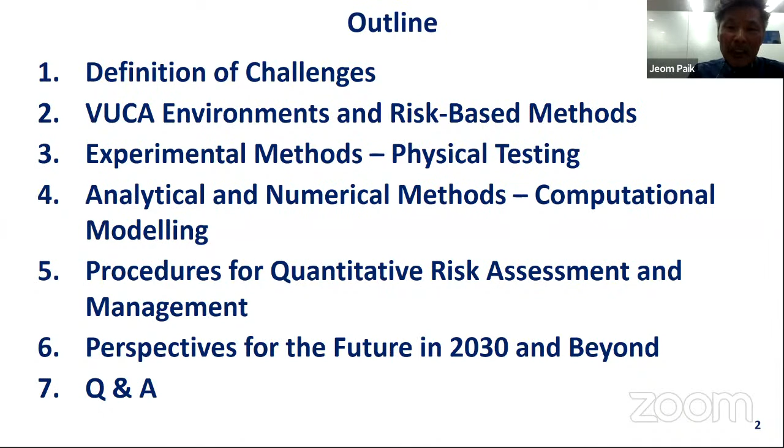Then I'm going to talk about the VUCA environments and risk-based methods, then experimental methods by physical testing, then analytical and numerical methods by computational modeling. I will present some procedures for quantitative risk assessment and management, and I'd like to say something about the perspectives for the future in 2030 and beyond. Finally, we are going to have a Q&A session.

Definition of challenges. The United Nations strongly suggests looking at the sustainable development goals in association with a total of 17 challenges. As a matter of fact, a number of the grand challenges are relevant. They may be categorized into 10 groups, which are equally important.

One of the grand challenges is the issue of energy shortage. Over 15% of the population on Earth are living without electricity. With a rapid growth of industrial systems and products operated by electricity, it is expected that the demand for energy will be increasing further in the future. So we have to do something to resolve this issue for energy shortage in terms of meeting sustainability, economy, environmental friendliness, and safety.

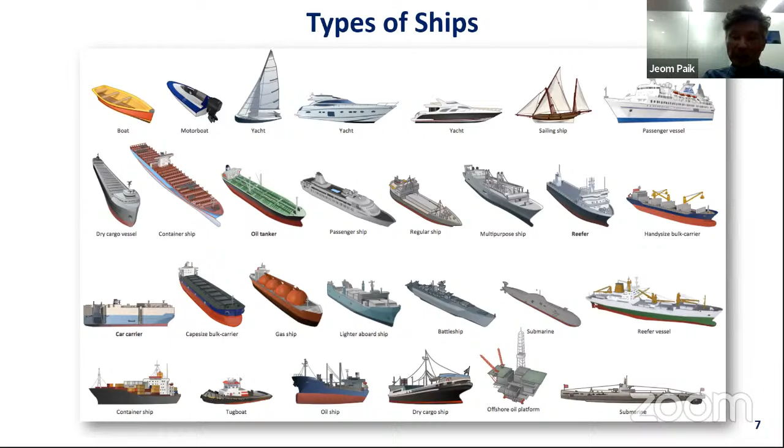Sea and the subsea are, as they say, a treasure house of resources for energy and food. Various types of offshore installations have been developed for energy source production or harvesting, oil or LNG terminals, electric power generation, and other special purposes at sea.

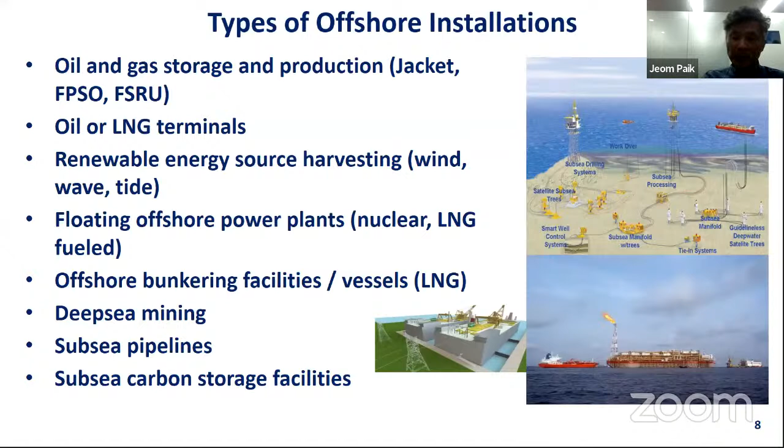Floating types of offshore installations have been used to develop deep or ultra-deep water areas, which are not feasible for fixed-type offshore platforms used in relatively shallow waters. As of 2020, 225 FPSOs are being operated all over the world.

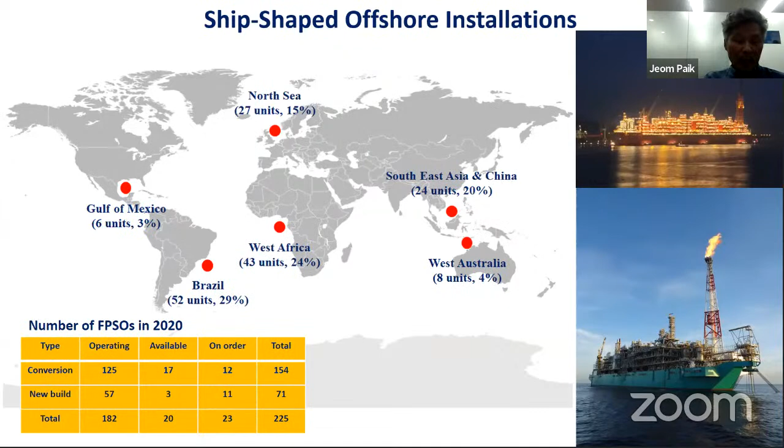Ships and offshore structures are subjected to various ocean environmental conditions in operation, which include waves and wind. They should be able to sustain such environmental conditions. For safety engineering of ships and offshore structures, ocean environmental conditions should be quantified with accuracy and certainty.

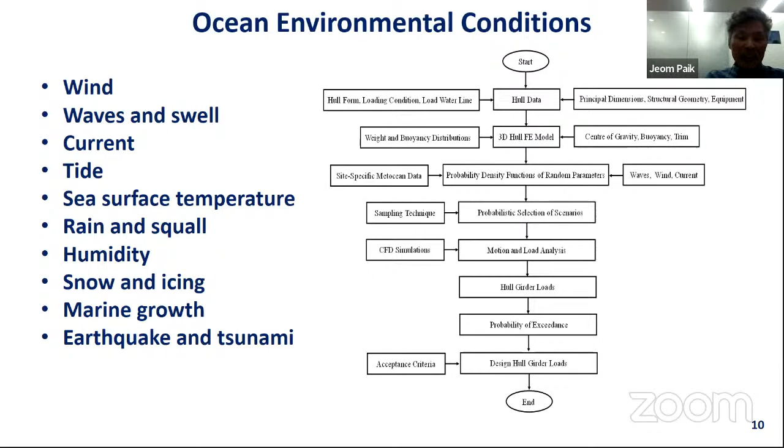While in service, ships and offshore structures are necessarily subjected to normal conditions, but they are likely subjected to various types of abnormal conditions.

From the beginning of construction, ships and offshore structures are subjected to extremely high temperatures of over 1000 degrees Celsius, owing to welding and flame cutting, which result in initial imperfections in the form of initial deformations and residual stresses.

Freak and rogue waves or wind give rise to abnormal loads. Dynamic pressure loads arise from sloshing, slamming, or green water.

In Arctic operation, ships and offshore structures are subjected to sub-zero temperatures. Cryogenic conditions are owing to LNG or liquefied hydrogen cargo. They may also arise from accidental leakage of LNG fuels. In this case, steel structures can exhibit brittle fracture, which gives rise to a catastrophe.

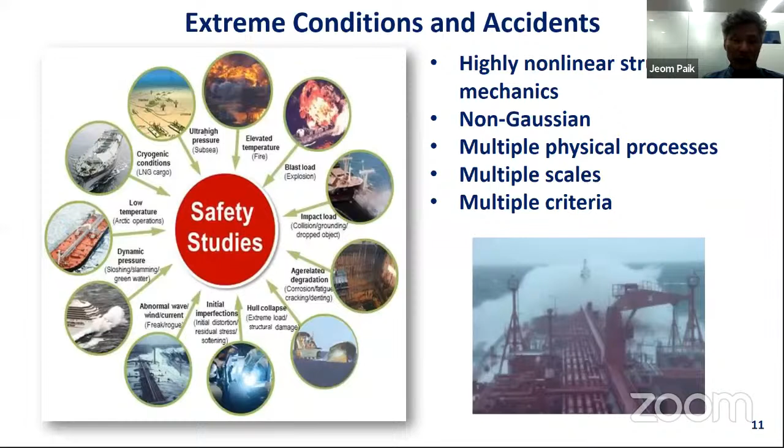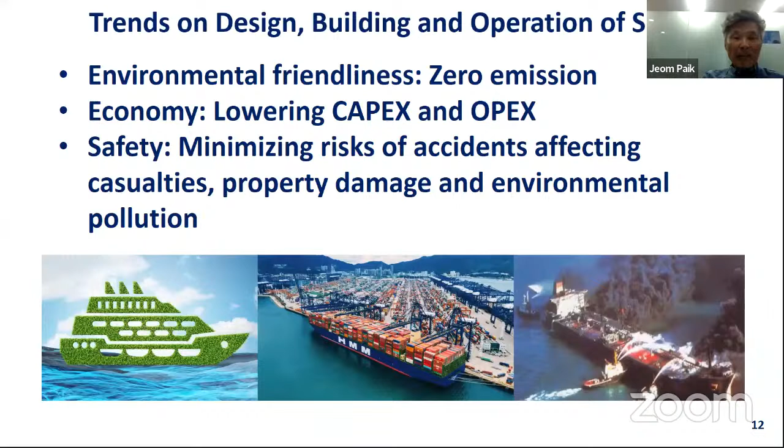Obvious trends are relevant to the design, building, and operation of ships and offshore structures in terms of environmental friendliness, economy, and safety. To achieve environmental friendliness, zero emission and decarbonization should be applied for shipping. Alternative fuels such as LNG, ammonia, or hydrogen gas have already been considered to propel ships.

Here is a 3-minute clip on this perspective from the UK Royal Institution of Naval Architects.

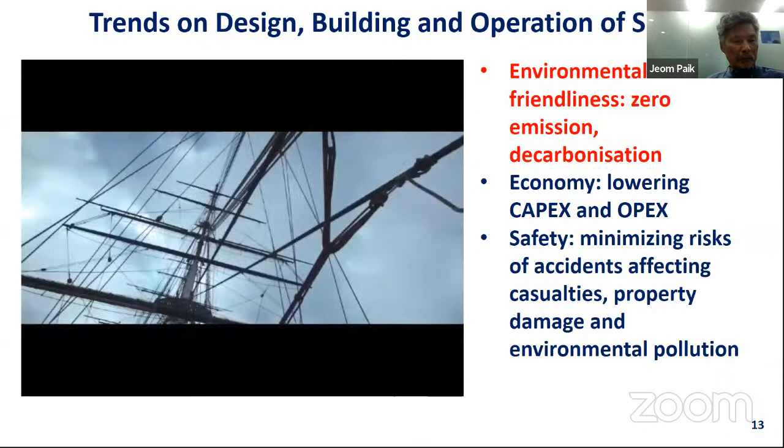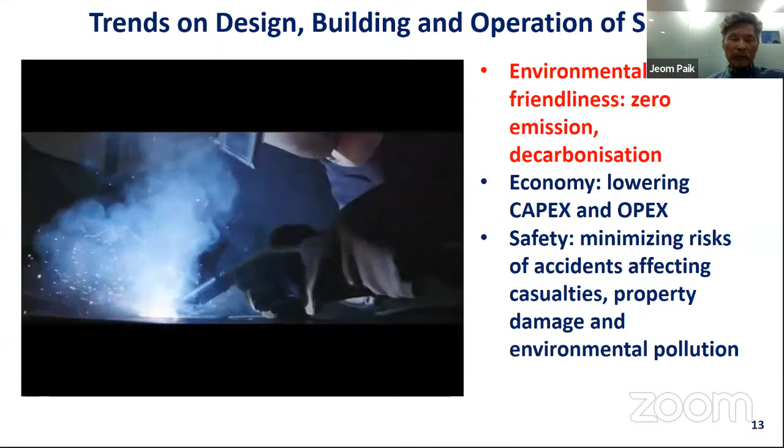So RINA has evolved with the times over its 160 years to be at the forefront of innovation, disruptors and enablers. Whether it's the design, construction, operation or maintenance of marine vessels, that's what we do. I'm extremely proud myself to be a naval architect, and I consider ourselves total engineers.

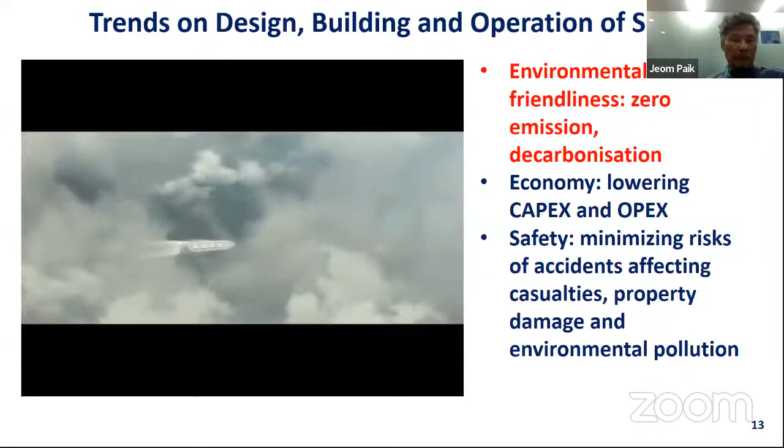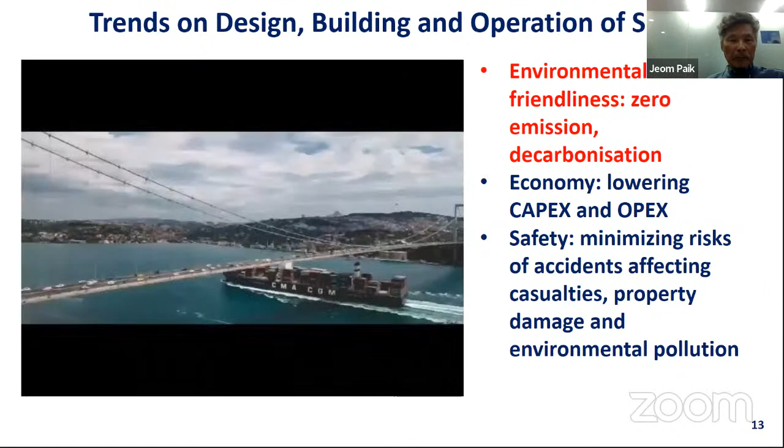The Royal Institution is the governing body for technical excellence and prowess within naval architecture and maritime engineering. It's not just a British-centric organisation. We are represented globally in 96 countries. So what we are is the knowledge centre, and the knowledge centre for ideas.

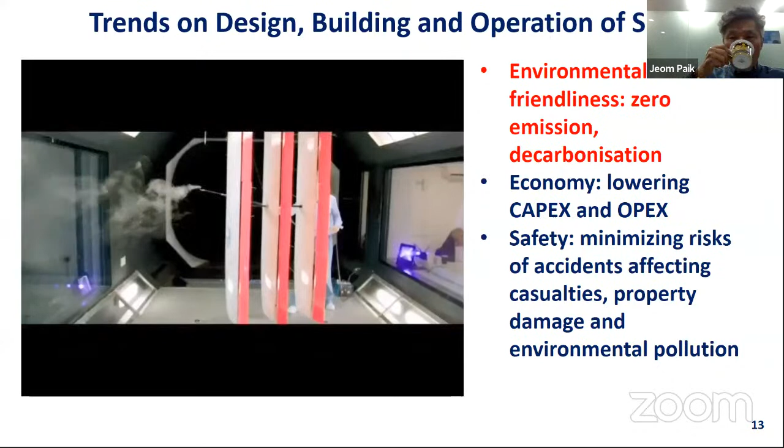RINA is at the forefront of learning and education. We accredit universities, colleges, businesses. We look at the continual professional development of all our members and all our engineers. RINA has to evolve with the time.

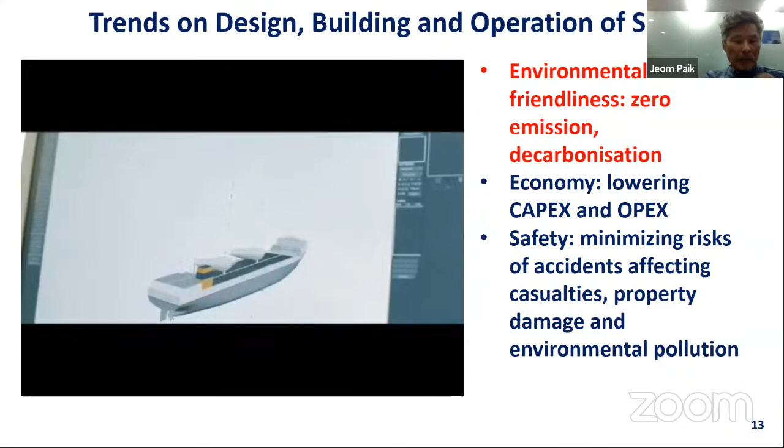We look at the digital revolution that's happening and all the threat actors that we currently face. Cybersecurity is something we take extremely seriously. We lead from the front. We don't just talk about this.

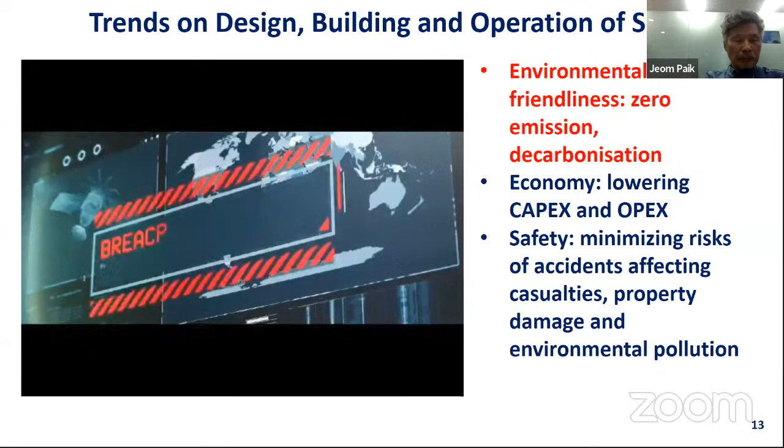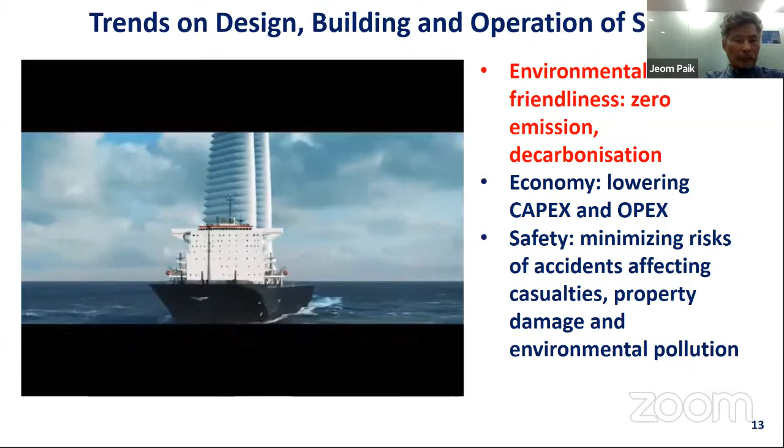Sustainability within RINA is the big question. Decarbonization, net zero, the impact for the ship owners, the impact on design, research and technology. Wind propulsion is a major area of focus for the Royal Institution.

All the thought leadership is fed through into the peak bodies such as the IMO, whereby we can influence and debate regulation and policy to make the difference. The IMO is an agency of the United Nations. We work together with 174 member states to find consensus on issues like safety and environmental protection.

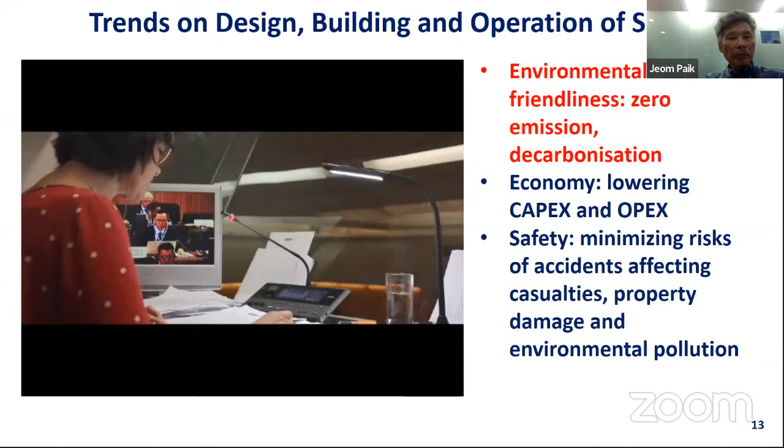RINA has had a long history of working on improving safety. It is a hugely exciting time. We're in the time of great change and transition. The role of RINA is very, very important.

We are doing everything we can to design more efficient ships, to adapt ships to use different types of fuels. It's really important that RINA drives the education that's required so that we get the right people with the right skills into the maritime industry.

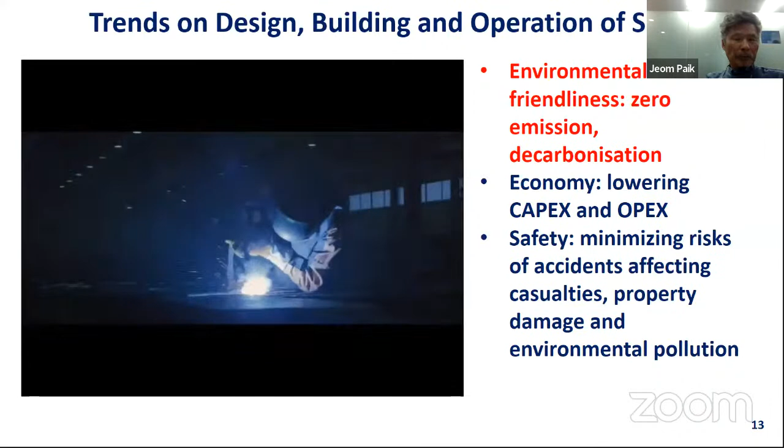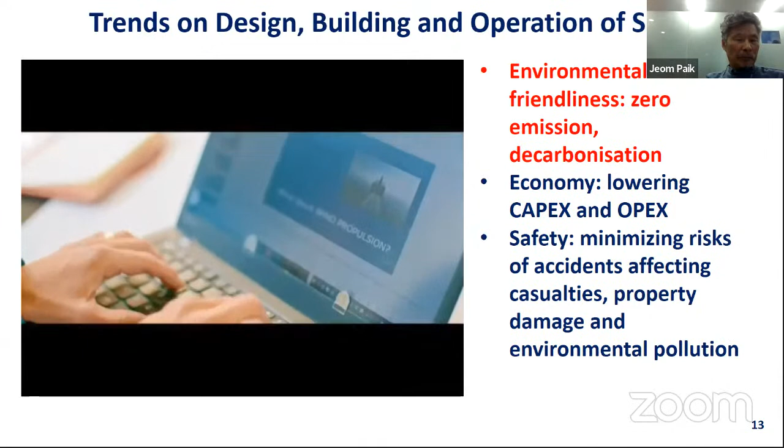When you're training to be a naval architect, it's really beneficial to be part of an organisation like RINA. This is because there's an opportunity to exchange knowledge, learn from people who've been in the industry for a long time, and also source information and academic papers. In addition, it's not just open to naval architects, it's also open to the wider maritime industry.

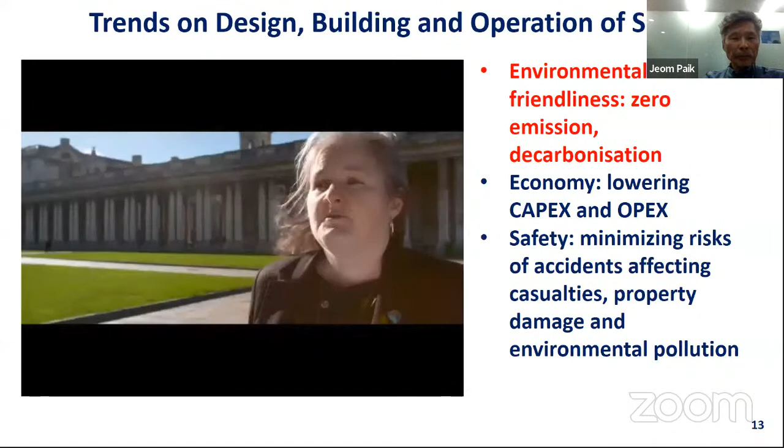RINA gives you lots of opportunities. The Royal Institution is changing. We are currently going through our digital transformation. We are modernising the way we look and communicate with members.

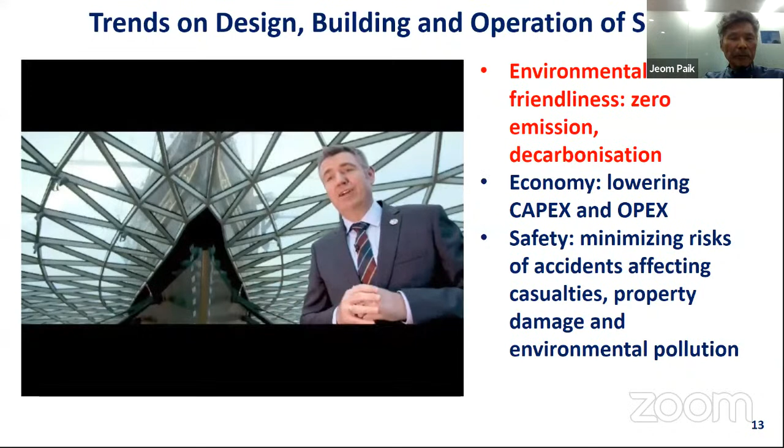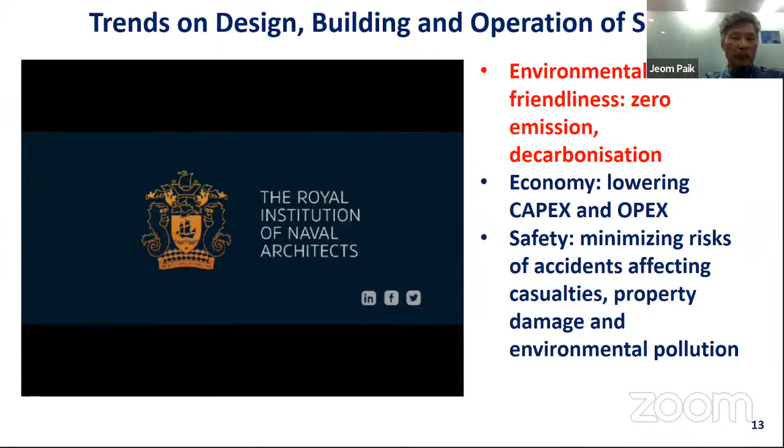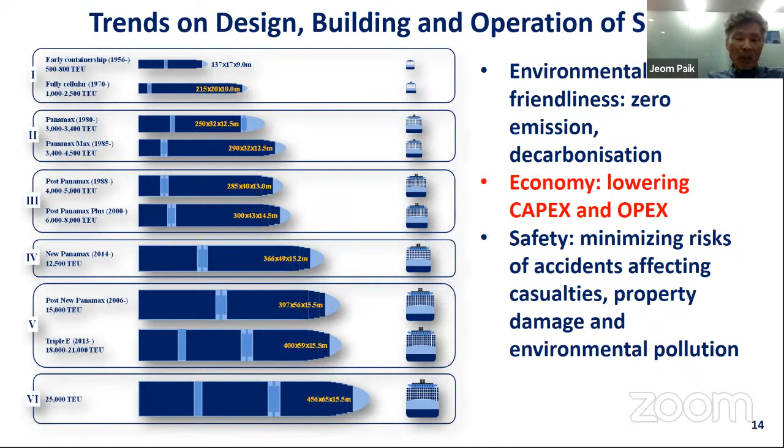In recent years, the size of ships has become much larger. This is because the international shipping industry desires to economize by lowering operating expenditures as well as building costs. Therefore, ship sizes have increased substantially, and with them, the capacity to carry more cargo for the same or lower costs.

Despite significant efforts, maritime accidents continue to occur, affecting casualties, property damages, and marine pollution. Therefore, it is very important to minimize the risks of accidents at every stage of design, construction, operation, and decommissioning.

VUCA environments and risk-based methods. Traditional allowable stress-based methods are no longer adequate to apply, and therefore, limit state-based criteria must be used for structural design and safety assessment.

Structural systems or their components reach limit states if they fail to perform their functionalities. Four types of limit states are relevant, namely ultimate limit states, serviceability limit states, fatigue limit states, and accidental limit states.

Ultimate limit states are caused by buckling and plasticity under extreme conditions. Serviceability limit states are associated with noise and vibration. Fatigue limit states are due to initiation and growth of cracking damage under repeated loading. Accidental limit states are associated with structural crashworthiness and survivability in accidents.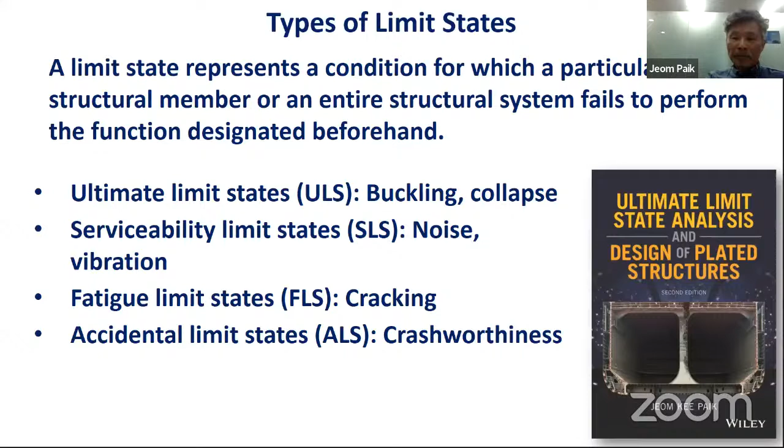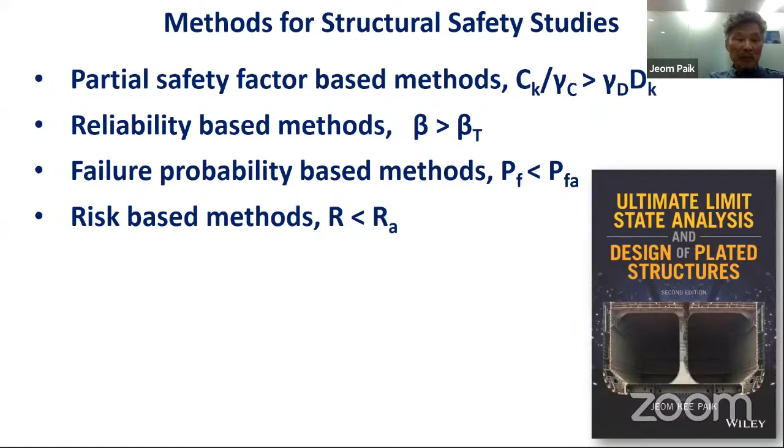Four types of structural safety study methods are relevant, namely partial safety factor-based method, reliability-based method, failure probability-based method, and the risk-based method. Currently, shipbuilding and offshore construction industries primarily use partial safety factor-based methods for structural designs.

However, accidents are the result of VUCA environmental and operational conditions in terms of volatility, uncertainty, complexity, and ambiguity. It is now well recognized that risk-based methods are the best way to effectively manage VUCA environments and ultimately resolve such challenges.

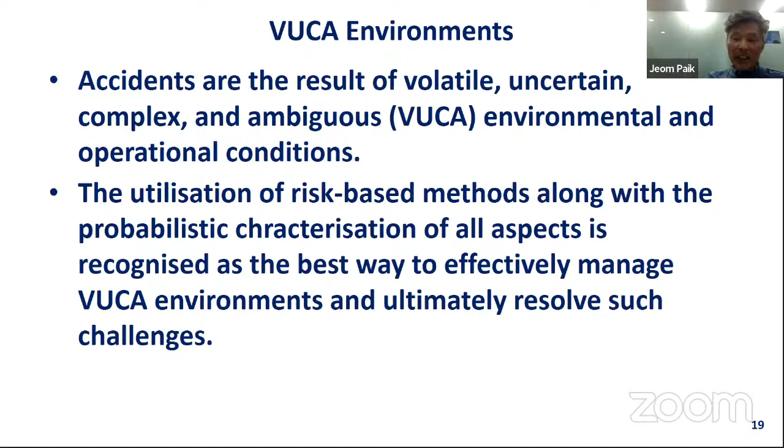Paradigm shift is now relevant for safety design engineering of ships and offshore structures under extreme conditions and accidents. Not only functional requirements, but also health, safety, the environment, and ergonomics, or HSE&E requirements should be applied.

Functional requirements present the operability in normal conditions, but the HSE&E requirements address safe performance and integrity in extreme and accidental conditions. The former can use the prescriptive approach with linear algorithms, but the latter should use the probabilistic approach with non-linear algorithms.

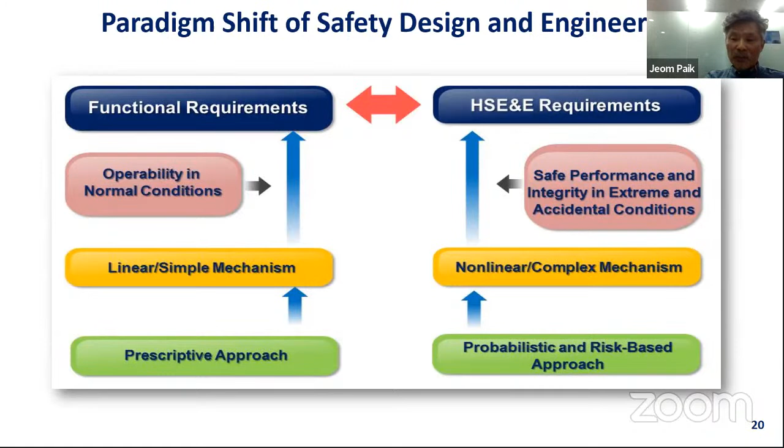In the engineering community, risk is defined as a product of F and C. F is the frequency of hazards, and C is the consequence or severity of hazards, which is characterized by limit states and structural crashworthiness analysis.

The task of risk assessment is to calculate the risk R. To be safe, risk R should be smaller than the acceptable level in association with ALARP, or as low as reasonably practicable. Otherwise, risk management is required to reduce F or C or both.

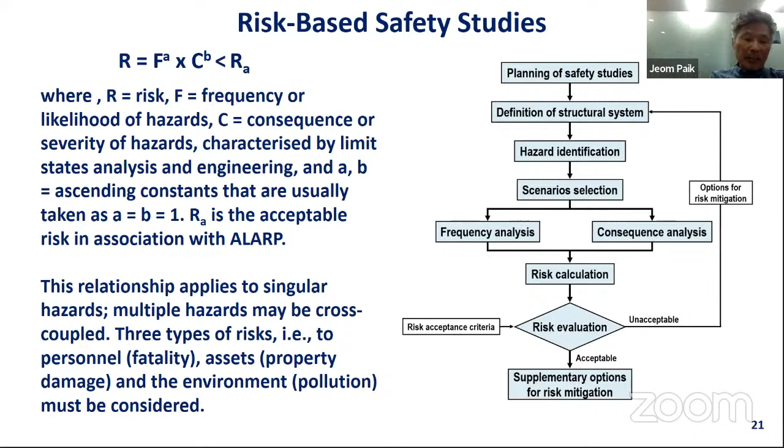Risk mitigation options are applied from the cost versus benefit analysis.

An extreme or accidental event in a structural system is always associated with multiple parameters, which are always random and probabilistic by nature. Therefore, a huge number of possible scenarios must be considered for the real events.

For advanced structural safety studies that involve refined computations and physical model testing, it is essential to select a set of realistic scenarios which should represent all the possible events, but with a limited number, needed to minimize computational costs.

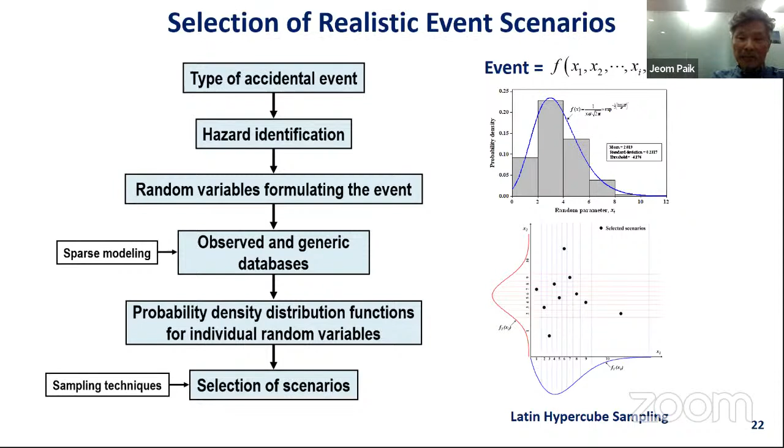Experimental methods by physical testing. For the limit states and structural crashworthiness analysis in extreme conditions and accidents, computations alone are not always sufficient enough, because they are highly nonlinear with a lot of uncertainties and multiple physical criteria involved.

Therefore, a multidisciplinary approach is essential together with testing, monitoring, and training. Specifically, testing with a full-scale prototype or at least large-scale models is highly recommended. Small-scale models or toy models may distort the real physics because scaling laws are unavailable to convert from small models to full-scale prototypes under extreme and accidental conditions.

KOSORI, the Korea Ship and Offshore Research Institute, which has been a Lloyd's Register Foundation Research Center of Excellence since 2008, built a world-class test site in Hadong, South Korea. Here is a 1-minute clip showing the test site.

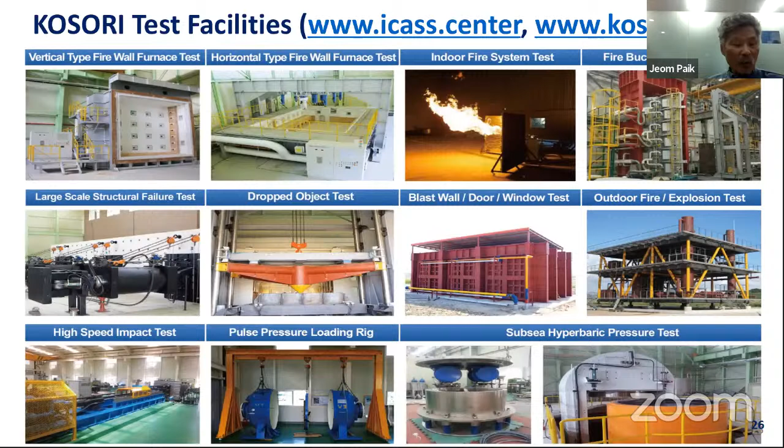Test facilities for extreme conditions and accidents such as buckling collapse, dropped objects, collisions, grounding, fires, and explosions are all available at the test site. Also, a subsea hyperbaric pressure test facility is available in which over 800 bar pressure loads, equivalent to water pressure at 8,000 meters water depth, can be applied in a hyperbaric cylinder with a diameter of 1.8 meters and a depth of 4 meters.

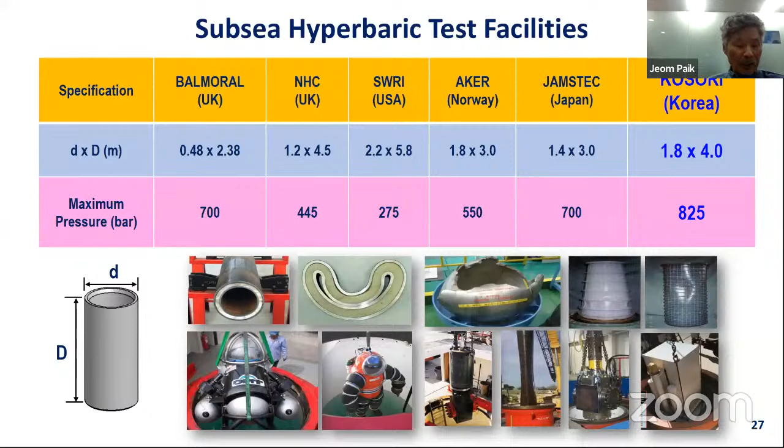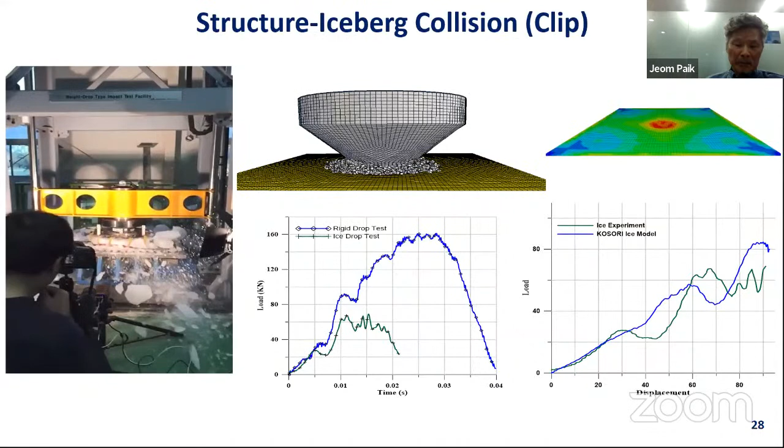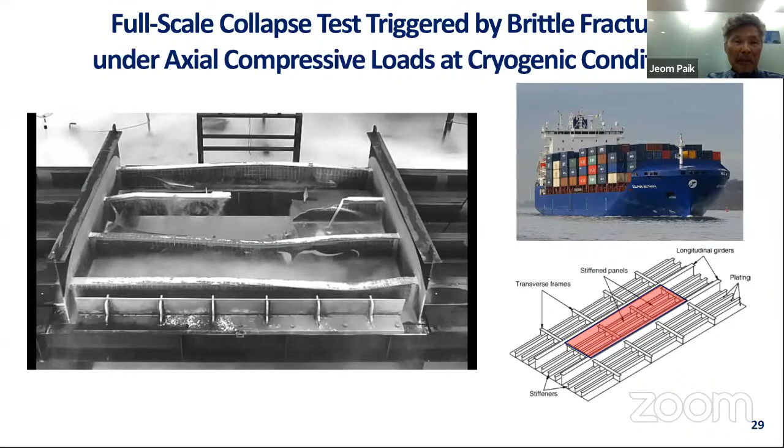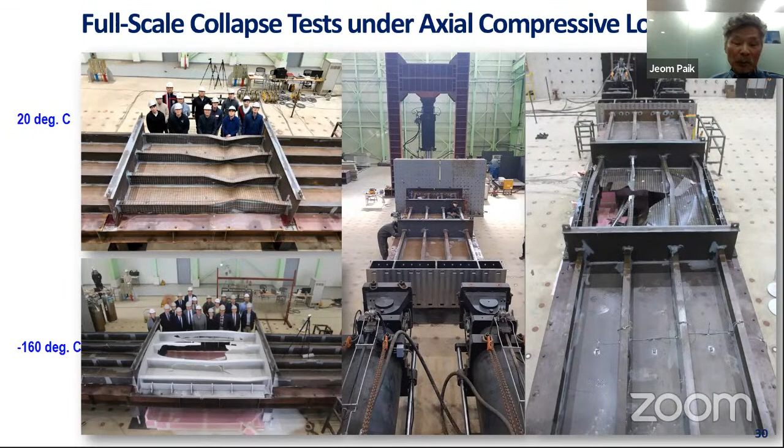As you can see from the testing, the steel structure reached ultimate limit state triggered by brittle fracture. On the other hand, at room temperature of 20 degrees Celsius, the same structure reaches ultimate limit state by usual tripping of stiffeners under axial compressive loading. These tests clearly show that brittle fracture can be a critical failure mode for steel structures under cryogenic conditions.

In order to mitigate blast pressure loads owing to explosions, water spray is usually applied as a safety measure.

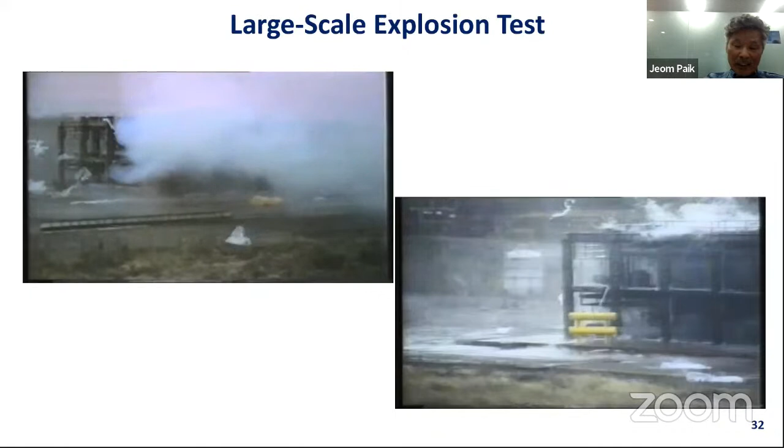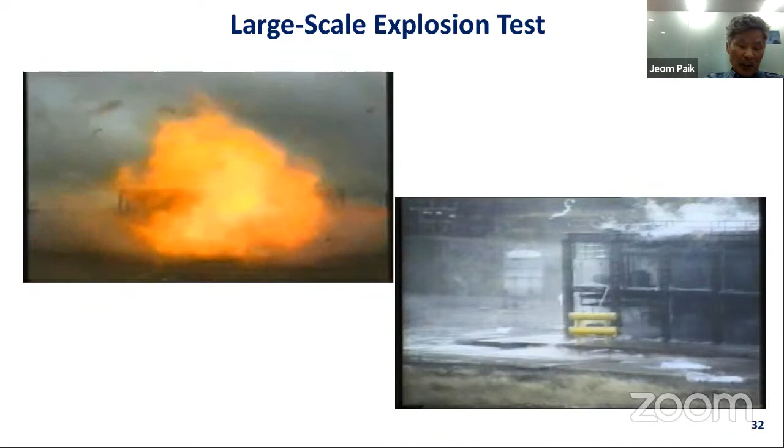The left-hand side test did not apply the water spray, and the right-hand side test applied the water spray. By comparing these two tests, you can see that the yellow bar structures outside the test frame did not survive the explosion in the left-hand side testing without the water spray safety measure, but they survived in the right-hand side testing with the water spray safety measure. This is because the water spray application significantly decreased the blast pressure loads owing to the explosion.

Analytical and numerical methods by computational modeling. Within the framework of quantitative risk assessment and management associated with extreme conditions and accidents, limit state and structural crashworthiness analysis should be undertaken.

The term structural crashworthiness is generally used to describe the performance of a structure impacted by another object or blast pressure loads, involving crushing and fracture. The aims of structural crashworthiness analysis are to identify resultant forces and energy absorption characteristics, as well as structural damage and survivability.

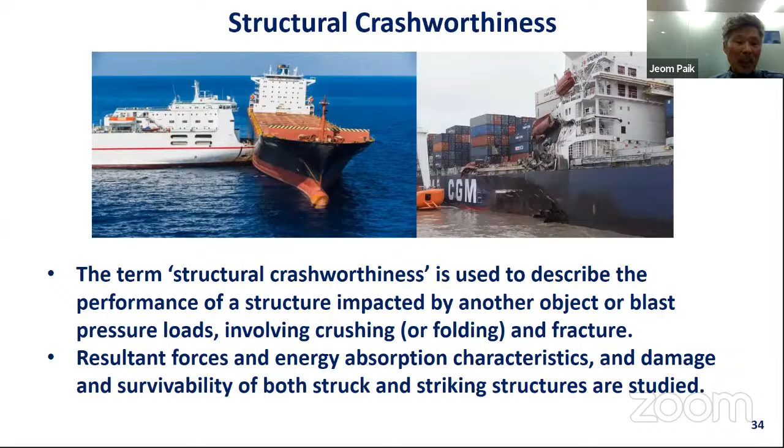A number of factors and mechanisms affect structural crashworthiness, namely buckling, plasticity, crushing, fracture, initial imperfections, age-related degradation, loading speed, temperature, friction, surrounding water, and the interaction between involved bodies. Such factors should then be formulated efficiently and accurately.

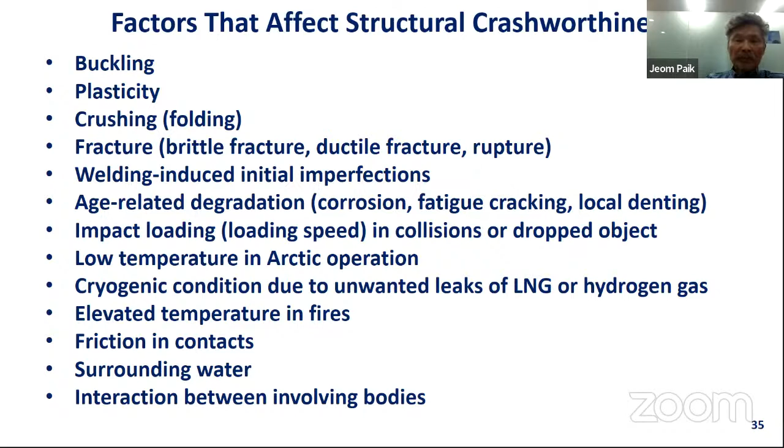In order to solve engineering problems, mathematical models should be formulated. Engineering modeling is a task of idealizations at an acceptable level of accuracy needed and the degree of complexity of the analysis to be used. Generally, a more sophisticated model produces a greater degree of accuracy.

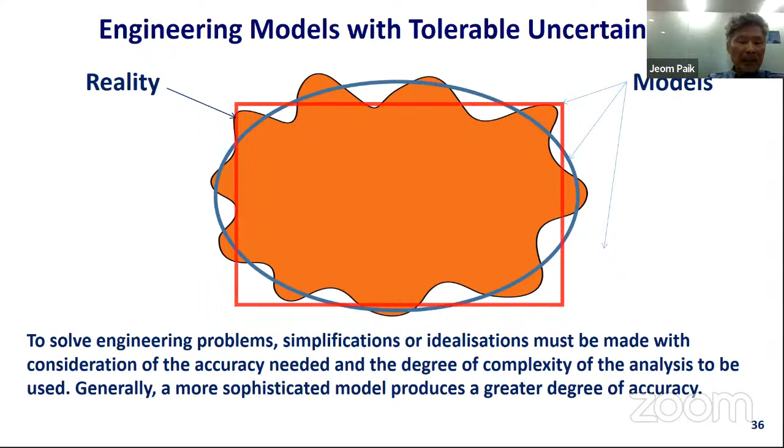Here is a simple example to illustrate the concept of engineering modeling. Just consider the calculation of this land area with an irregular shape. How can you calculate the land area within limited time and cost? Think about it. For engineering purposes, you may simplify the shape of the land area as a circle, rectangle, or triangle, so that the land area can be predicted easily by existing simple formulas. You can call them the circular model, rectangular model, or triangular model.

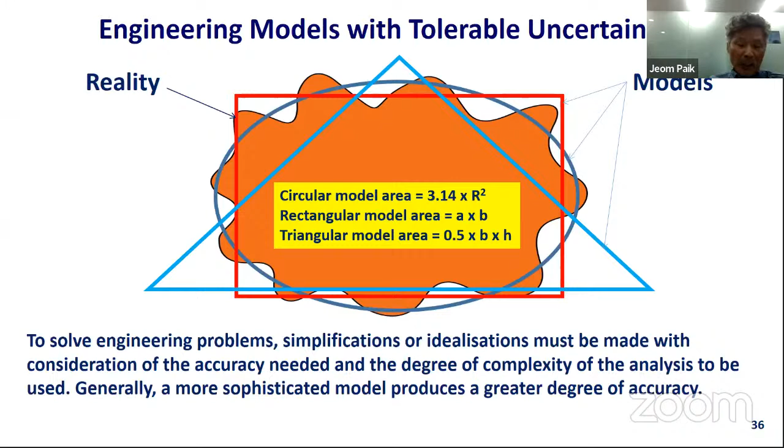Most of the main engineering works are to develop such models, which should be as simple as possible and also accurate.

For steel-plated structures, which are the basic structural components of ships and offshore structures, they are often modeled by assembly of plate stiffener combination models, plate stiffener separation models, or finite elements.

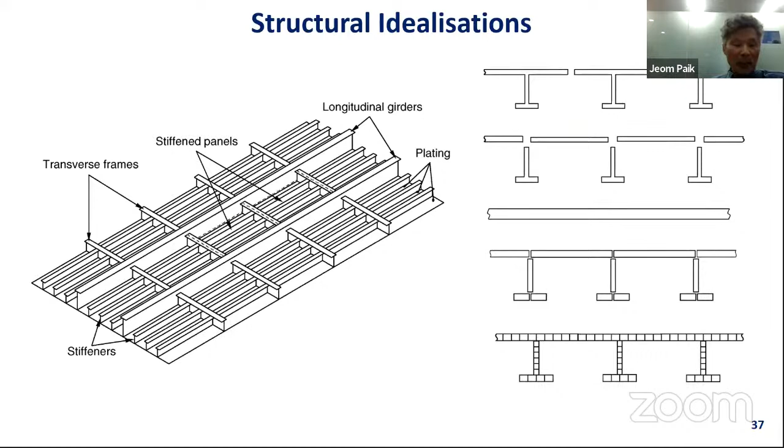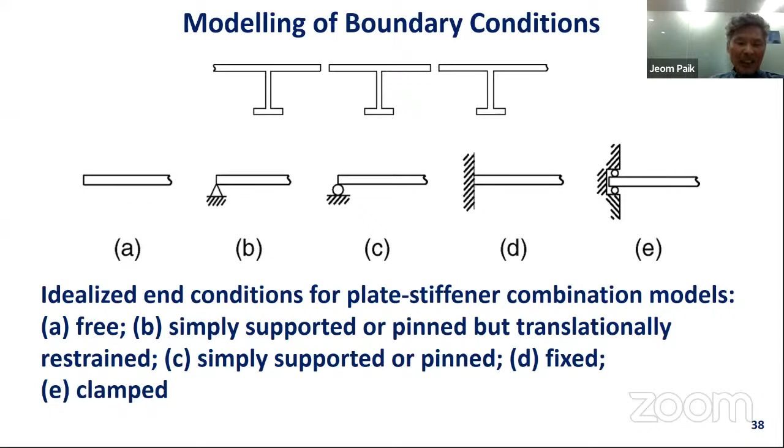Boundary conditions of structural members can be modeled in between pinned condition to fixed condition, depending on the degree of rotational restraints.

Analytical methods are basically aiming at solving governing differential equations under loading and boundary conditions. They are very useful because accurate solutions are provided as far as governing differential equations are formulated and they can be solved.

However, it is very difficult to apply analytical methods for the limit states and the structural crashworthiness analysis in extreme and accidental conditions. Computational methods are then required to apply instead.

Structural scantlings of ships and offshore installations are primarily determined by ultimate limit state criteria. Other types of limit states are considered as supplementary after the ultimate limit states-based design is completed.

Ultimate limit state-based design optimization procedure is used for structural design and multiple objectives such as weight minimization and safety maximization.

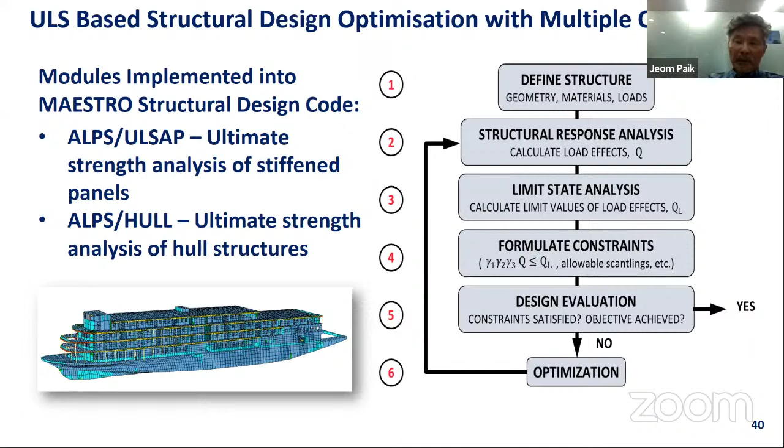In computational modeling for the limit states and the structural crashworthiness analysis, it is important to understand that the material properties in impact loading are totally different from those in static or quasi-static loading.

The material's yield strength tends to increase with the increase in loading speed. This behavior is dealt with in a parameter called strain rate. The increasing trend of the material yield stress for high tensile steel is more moderate than for ordinary steel.

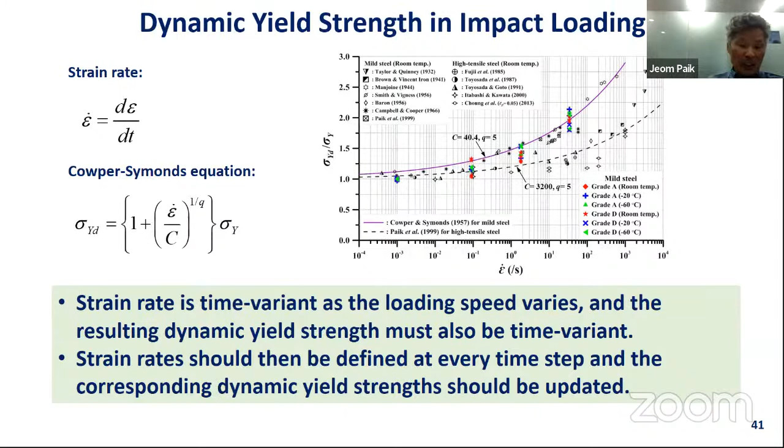On the other hand, the material's fracture strain tends to decrease with the increase in loading speed or strain rate. This means that the structures struck by impact loading are vulnerable to fracture.

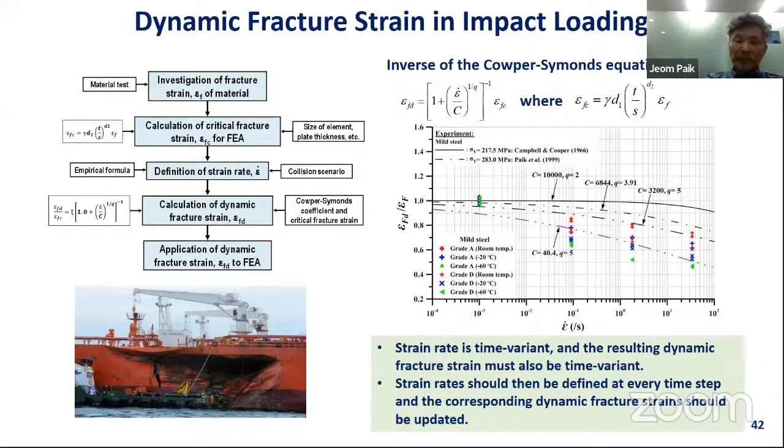Ships and offshore structures are also exposed to sub-zero temperatures in Arctic operation or cryogenic conditions owing to unwanted leaks of LNG or hydrogen gas.

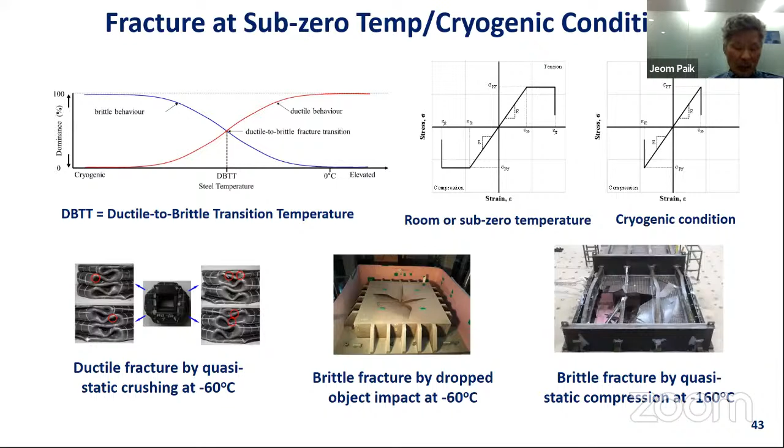Brittle fracture may happen if the exposed temperature is lower than a critical temperature. Brittle fracture may also happen even at sub-zero temperature if loading speed is very high. Relevant material models should be used to take into account the effect of sub-zero temperatures.

Ships and offshore structures may also be exposed to elevated temperatures in fires. The material's elastic modulus and yield strength decrease significantly with the increase in temperature.

Relevant material models should be used to take into account the effect of elevated temperatures for fire safety engineering in association with the progressive structural collapse in fires.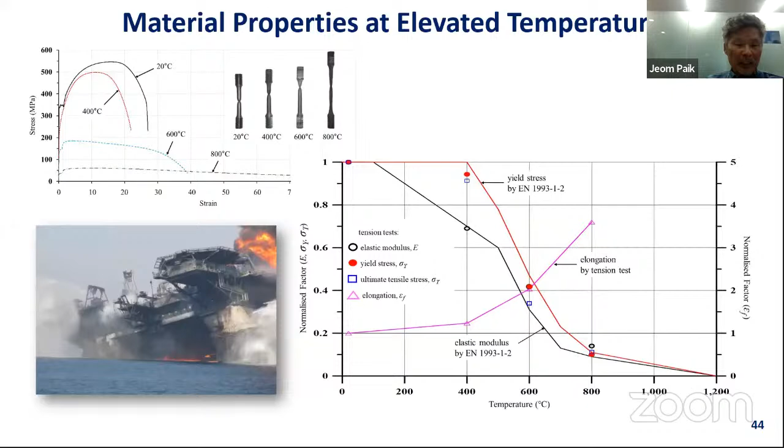From now on, procedures of quantitative risk assessment and management are addressed for some selective events of accidents.

There are hazards that ships and ship-shaped offshore installations break their hull owing to aging-related deterioration or accident-induced damage or accidental flooding, together with extreme hull girder loading conditions. Computational models for the progressive hull girder collapse analysis under such conditions should be developed.

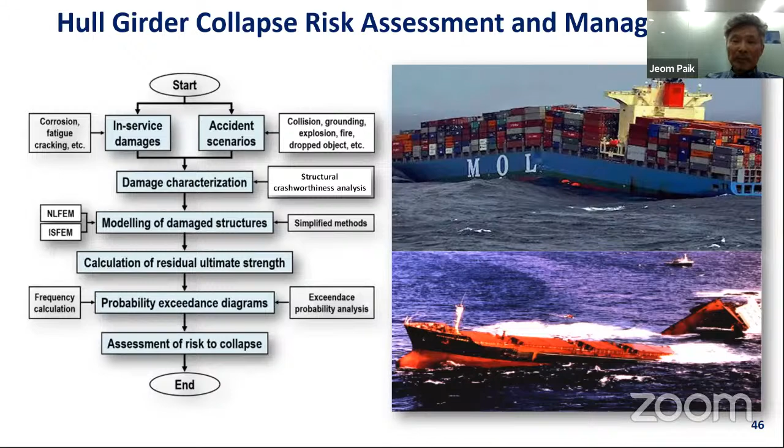There are hazards of collisions between ships or between ship-shaped offshore installations and shuttle tankers or supply vessels. Various parameters affect collisions, including size of striking and struck ships, speed of striking and struck ships, shape of striking ship bow, location, and angle of collisions, etc.

Both frequency and consequence are computed to calculate collision risk, where a number of realistic collision scenarios are selected in a probabilistic manner. Structural crashworthiness analysis in collisions involving crushing and fracture is conducted by nonlinear finite element methods.

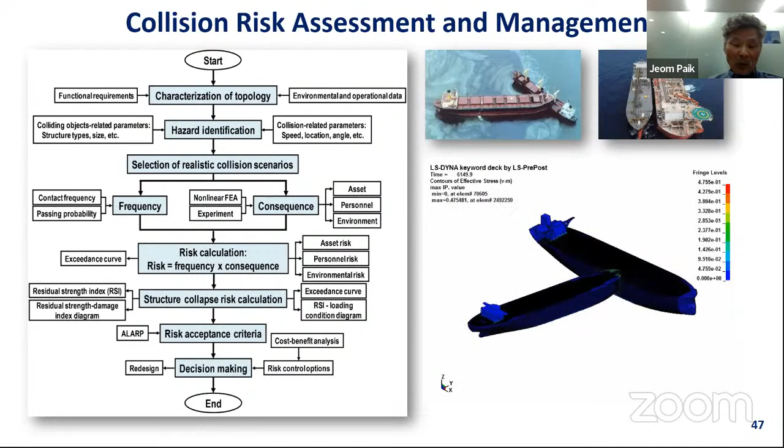Grounding risk is associated with the bottom damage of ships when a ship runs onto a rock with forward speed. Again, various parameters affect ship grounding, including size of grounded ship, forward speed, trim angle, geometry and shape of rock, etc. Breaching damage can be formed in grounding, resulting in capsizing or spills of hazardous cargo.

Fire safety engineering studies how fires start, spread, and grow, causing structural damage and collapse. A hydrocarbon fire in engineering structures is a combustible vapor or gas that combines with an oxidizer, usually oxygen or air, in a combustion process that manifests in the evolution of light, heat, and flame.

Various parameters affect fires, including gas leak rate, gas leak duration, gas leak direction, gas leak location, wind direction, and wind speed. In order to characterize fire loads, CFD or computational fluid dynamics simulations are required.

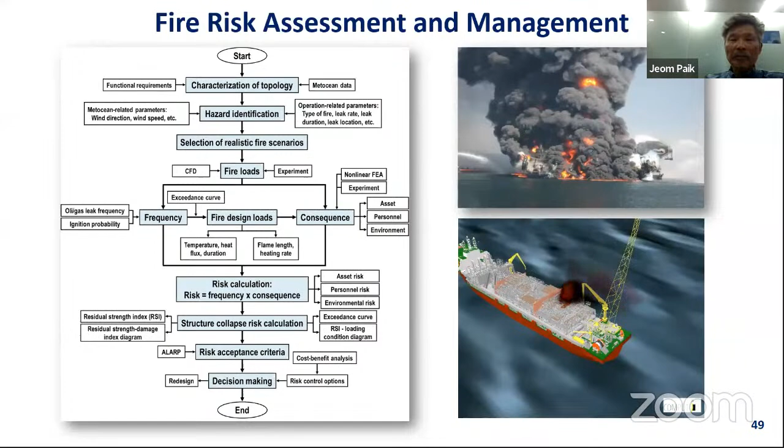Explosions are often accompanied by fires, but their underlying mechanisms are completely different from each other. Released hydrocarbons, such as oil or gas, that combine with an oxidizer, usually oxygen or air, together with an ignition source, cause fires when the concentration ratio of the gas cloud is thick.

However, explosion occurs when the gas concentration ratio becomes thin. In contrast to fires, hydrocarbon explosions result in a blast or rapid increase in overpressure, which can cause catastrophic failure of structures.

Parameters affecting explosions additionally include the gas volume, gas cloud location, and the gas cloud size.

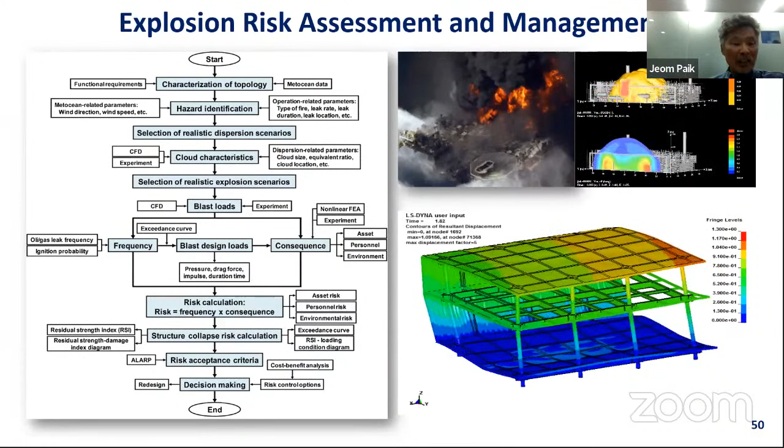Seafloor earthquakes are a safety concern for both fixed and floating offshore installations because they may lead to hazards associated with damage to sensitive equipment, such as damaged nuclear reactors in a ship-shaped nuclear power plant, or a fire initiated by broken gas lines, risers, and/or power lines.

Ship-shaped offshore installations must be designed so that their safety is secured even under seismic loading due to earthquakes. Elastic waves of excitation are generated in soils, and the resulting energy is radiated in earthquakes.

The responses of hull structures and soils to such energy are governed by ship motions, such as sway and heave motions, together with surrounding water effects. Computational models should be developed for seismic impact engineering of offshore installations.

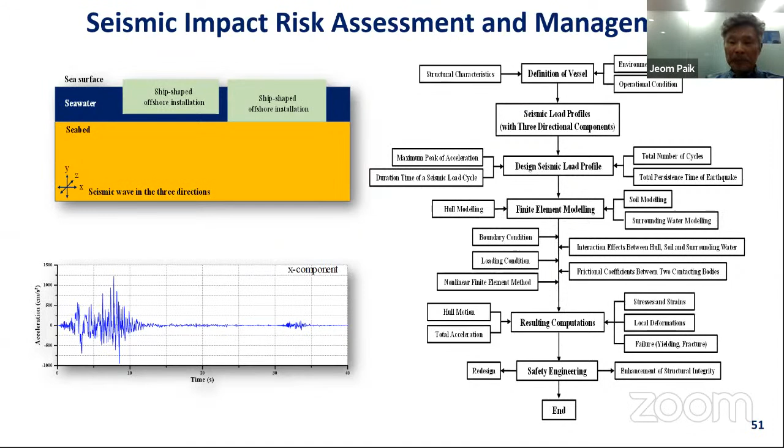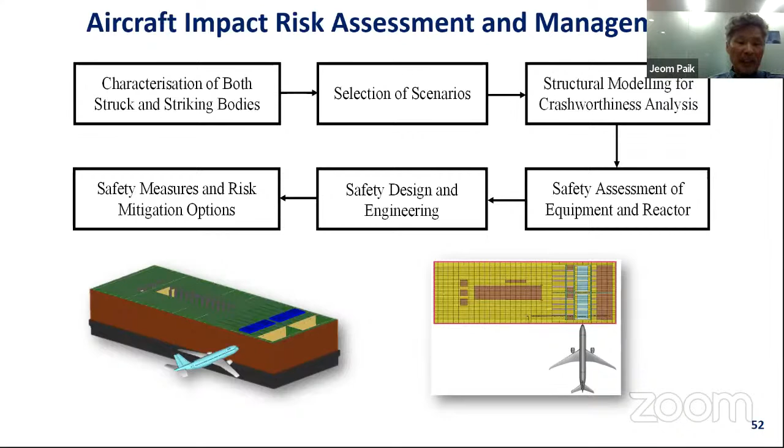Ship-shaped nuclear power plants may be subjected to aircraft impacts owing to terrorist attacks or accidents. Even in such a hazardous scenario, the catastrophic consequences must be prevented or minimized.

An applied example is shown here, in which an aircraft, a Boeing 777 aeroplane, strikes the side structure of a ship-shaped nuclear power plant at full speed of 200 meters per second.

The double side space of the hull structure has been strengthened by concrete. The main concern is to confirm if the silo and the nuclear reactor zone is safe enough during this terrorist attack.

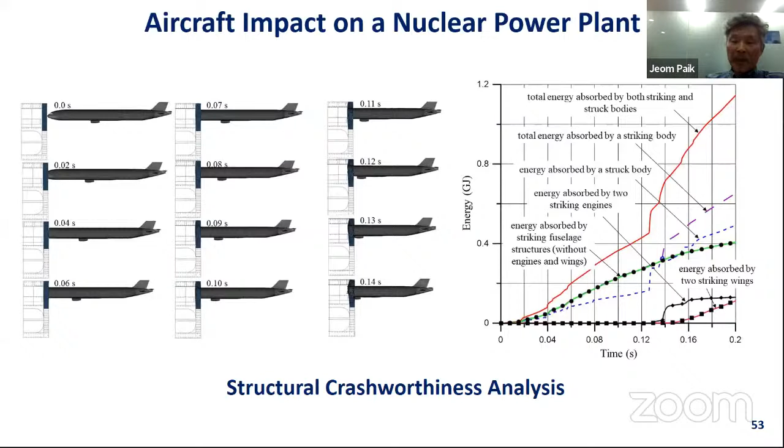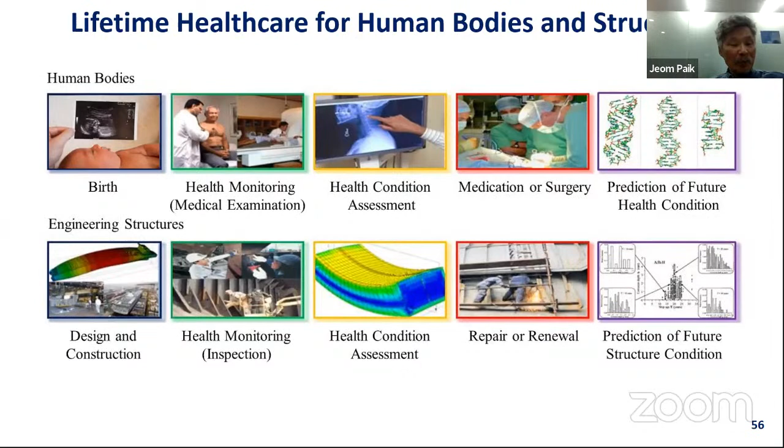Health conditions are assessed to quantify reductions in structural safety and integrity due to damage and deterioration, and thereby determine whether repair or renewal procedures are required. Likely future damage, such as corrosion wastage, is predicted and appropriate proactive safety measures are taken.

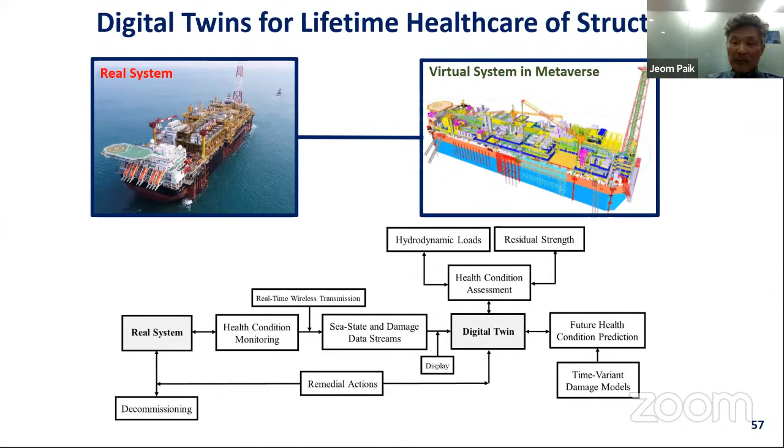Thank you very much for your attention. I will be pleased to reply to any questions you may have.